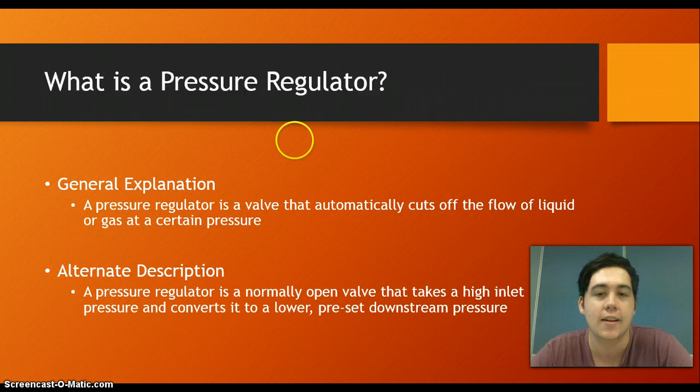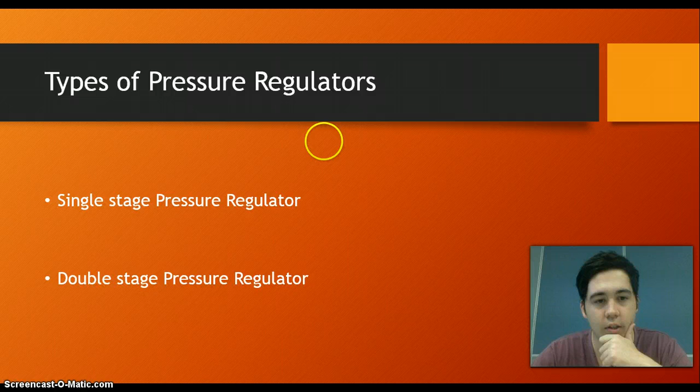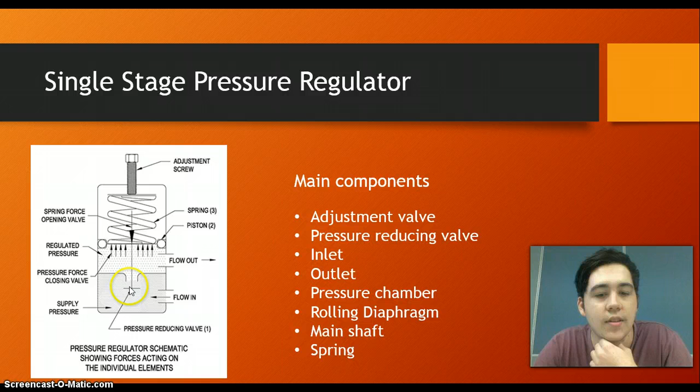You have the inlet, or as it's called in this diagram, the flow in. You have the outlet, which is flow out. You have the pressure chamber, which is this rectangular chamber right here with the arrows inside of it. You have the rolling diaphragm. It's pretty hard to see right here, but it's basically just a line that kind of goes along there. And we have the main shaft, which is pretty much just this thin line here attached to the pressure reducing valve. And this is attached to the big spring, which you can see here.

So I'll give you a basic explanation of how a basic pressure regulator works. So basically how it starts off is the gas or liquid, we'll talk about liquid in this case just to make it easier, comes in through the inlet valve, which we'll say is right here, and it goes down here, around like this, and then we go up here, down this shaft here, into this chamber here. This is the pressure chamber. Now first obviously you set the screw to a certain pressure which you want. When the water comes in, if it's too high of a pressure, it will go up into this pressure chamber. If it's so high, it will push this spring up.

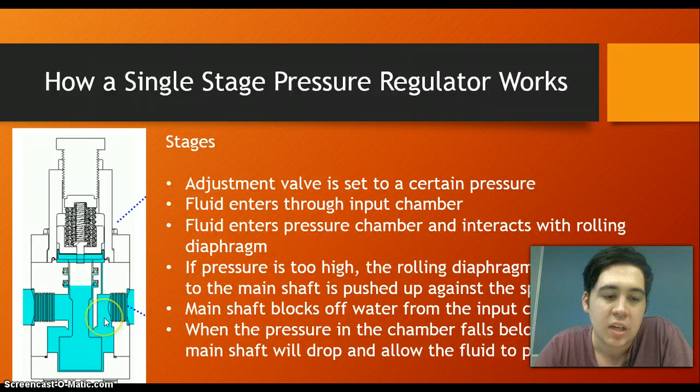Now this spring here is attached to this big long shaft which you see here, and this is called the main shaft. So when the pressure gets too high, it pushes against the rolling diaphragm, which is this line across here, pushes the spring up, which in turn causes this main shaft to push up, which will then block off the water coming in through the inlet. Since it's blocked off, no more water can come in, and therefore all the water up here in the pressure chamber will flow out through the outlet. And when that happens, the chamber depressurizes, which allows the spring to push back, which will then once again lower the main shaft, allowing the water to flow again. So that's basically how it reduces the pressure.

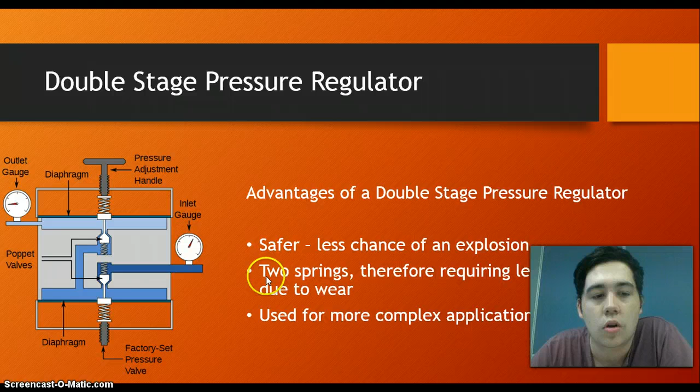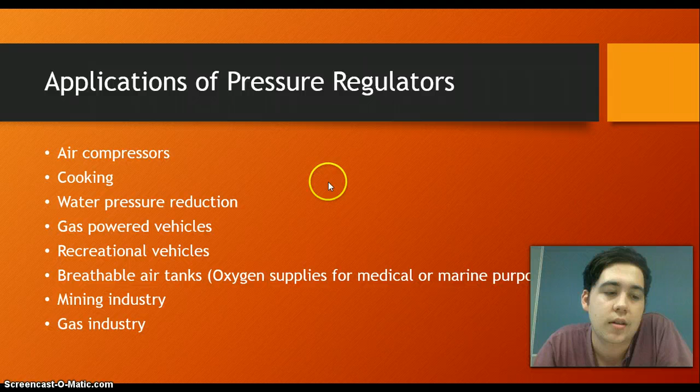The applications of pressure regulators, this is just some of them that are listed here. You have air compressors, cooking, water pressure reduction, gas-powered vehicles, recreational vehicles, breathable air tanks, so that's stuff like oxygen supplies for medical reasons, and oxygen tanks for marine purposes. They're used within the mining industry and the gas industry. Basically anything that involves pipelines and the flow of one liquid or gas from one place to another.